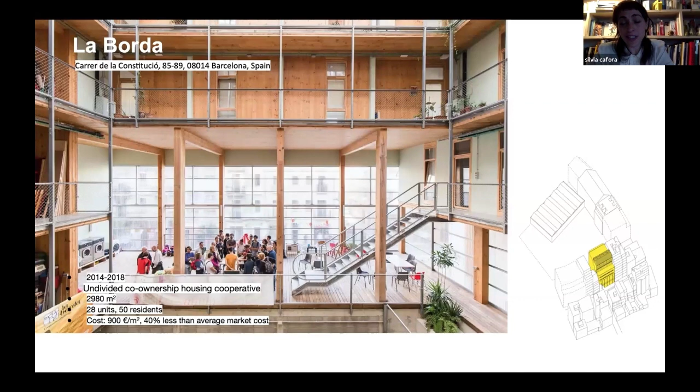So they decided to use this legal form, the undivided co-ownership housing cooperative, or right-to-use housing cooperative. It's interesting because, as you can see in the diagram, the ownership of the building is of the housing cooperative, while in this case the land is owned by the public administration.

The residents are members of the cooperative, and in order to enter and live in this building, they have to pay an entrance fee, and then a monthly fee that is below market rate. They have been able to produce an affordable pilot project, because this has been a pioneer project in Barcelona, and they created a network to do that.

Before everything, they involved the public, the municipality of Barcelona, and they created this relationship in order to have access to public land for a monthly fee.

Then they decided also to develop a network with different kinds of financing instruments, not just traditional banks, but also ethical banks, microcredits, and social bonds. And then they decided to ask actors of the social economy, the social market, to be the developers and builders of the building itself.

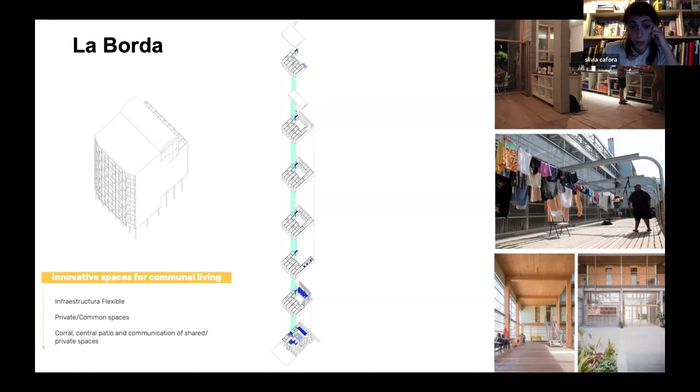Here you can see the interior of some apartments, and at the bottom left you can see this wooden frame that is one of the peculiarities of this building, because it has been the tallest wooden building in Spain for several years. This wooden frame allows flexibility among apartments, because with these portals they can easily add or remove a room from an apartment.

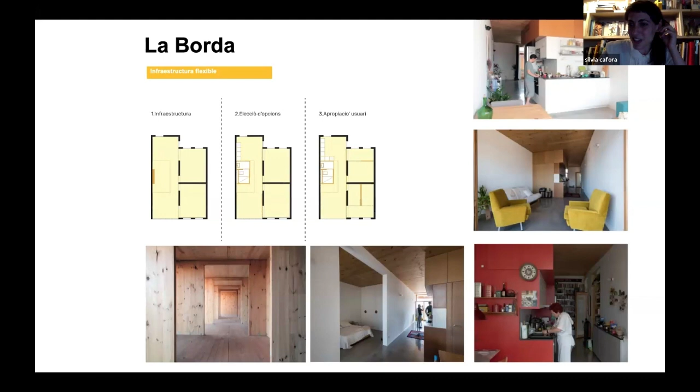That means maybe I enter La Borda, I've got 2 kids, so I need 2 rooms at least. Then my kids go to university, so I no longer need an extra room, so I give it to my neighbor who had new kids. It is an architectural device that helps the community evolve over time, and also a cultural apparatus, because can you imagine giving a room of your house to your neighbor? It's not something easy to think, but they work on this side too.

Something very important to frame here in La Borda is Barcelona itself, the municipality of Barcelona, because La Borda has been the first new cooperative in Barcelona, and after that they built 4 generations of cooperatives, and they are continuing building new right-to-use housing cooperatives. This is because the municipality of Barcelona decided to produce several tools to support this production.

First of all, they made this housing right plan, and they produced also urbanistic tools and administrative tools.

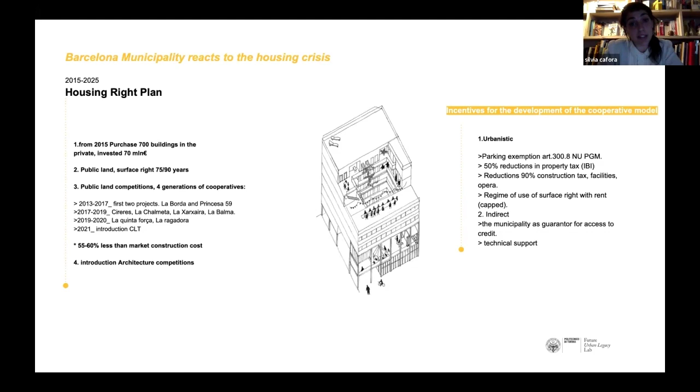Here there is La Balma, still in Barcelona. It is sister of La Borda, and it is the second right-to-use housing cooperative built in Barcelona by the same architects, La Col Cooperativa de Arquitectos de Barcelona, a group of architects that are very involved. We can say they are one of the subjects that triggered this new cooperativism in Barcelona.

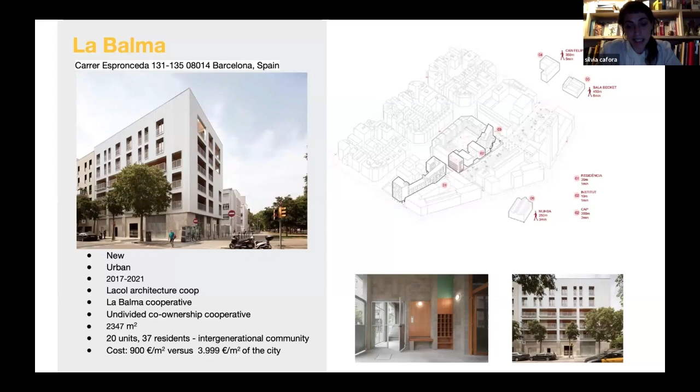As you can see here, they studied possibilities to make a flexible apartment with many public and communal spaces. Still in Barcelona, this is another cooperative.

It's interesting because it is Spain's first feminist and LGBTQ housing cooperative, started in 2018 and still in progress. It's interesting because it's not just a right-to-use housing cooperative, but they also have these peculiar members who decide to stay together.

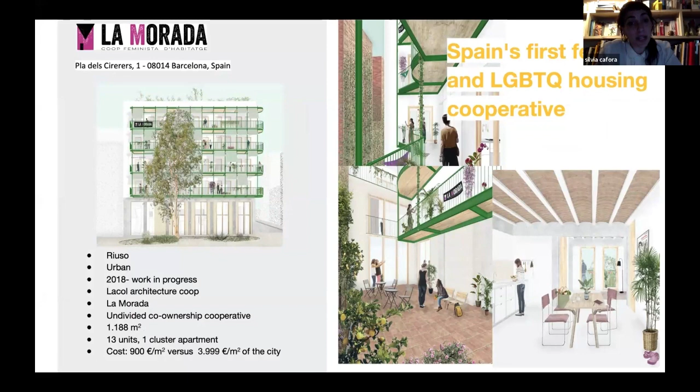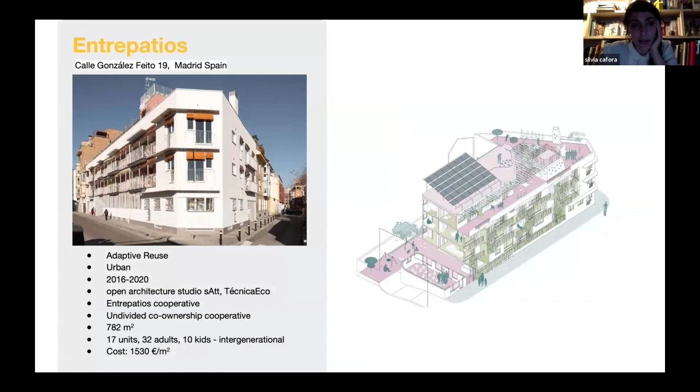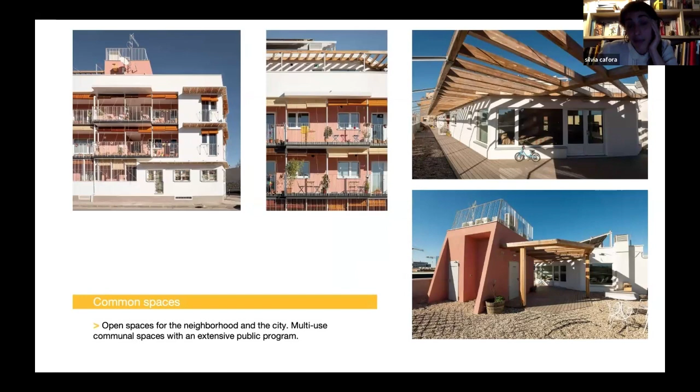Still in Spain, but we go to Madrid, because there is a spreading of all these right-to-use housing cooperatives in Spain. This one is interesting from an architectural point of view because it's not a new building like the others I've just shown you, but an adaptive reuse of a previous building that was underused or disused. They have been able to create a great space for living that is also affordable, since the base of all these projects is to make housing accessible and affordable.

So now we leave the sun in Barcelona and go to southern Germany, to Freiburg. I want to introduce a big player in Europe for housing affordability, the Mietshäuser Syndikat. Sorry for my German. The Mietshäuser Syndikat is, I would say, the inspiration—Nina, Dimitra, or Zoe, please correct me—for many community-led housing projects all over Europe.

Briefly, their story: we go back to the 90s. In Germany there was a strong financialization of housing, and a group of anarchists and squatters decided to stop squatting and create a model to access housing in a legal way, using neoliberalist tools like the LTD.

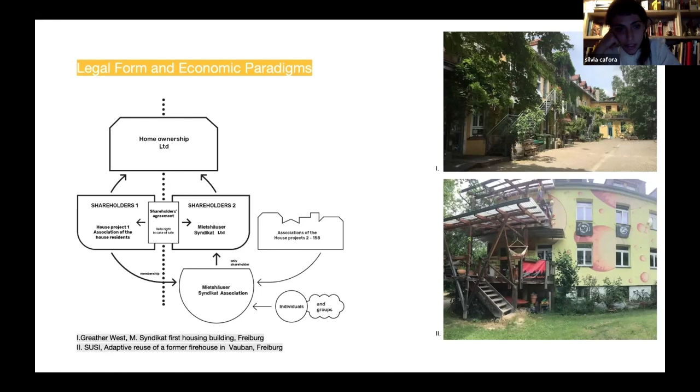Another important case I want to bring is a community land trust. We go to Liverpool in the UK, to the Granby Four Streets Community Land Trust. A community land trust is another model where the aim is always the same: to decommodify land and buildings, to make them affordable, and to keep them out of the market in the long run. The base of the community land trust is to divide the ownership: the land is owned by a trust composed of local administration, future residents, and the local community, which has veto right in case of sale, like the Mietshäuser Syndikat.

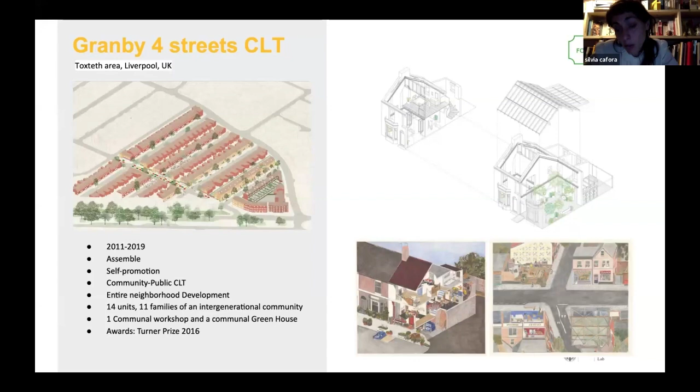It has been interesting because one of these spaces is a workshop where they produce the ceramics used to refurbish the housing. This was self-built by the residents together with Assemble. With this project, they gave work to 2 people from the neighborhood, who now work inside the Granby workshop. They also won another important prize, the Turner Prize for Contemporary Art.

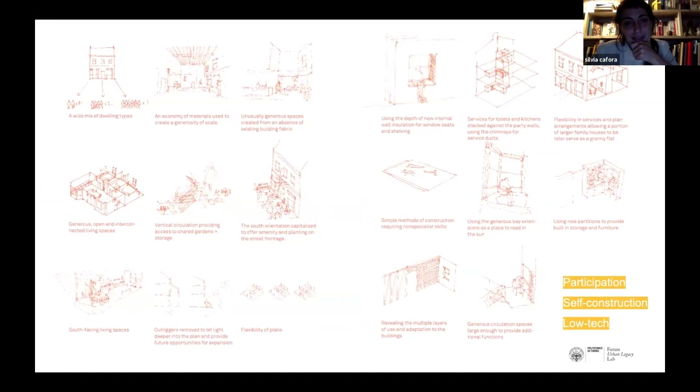They set some strategies for the architectural project and the building site that are very interesting. Community land trusts are also very spread around Europe and around the world. Even though it started in the US and arrived in Europe, in the UK and Northern Europe, it is now also spreading in Southern Europe. There are new projects in Catalonia and also in Italy, in Turin.

I'll go quickly here because I want to go straight to Italy. Time is almost gone, so I just want to point out one more thing.

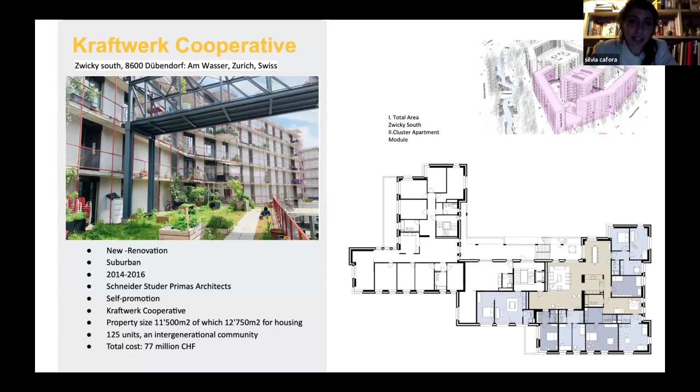A feature of a Swiss cooperative, the Kraftwerk cooperative, which also came from civic activism, from squatting activism in Zurich back in the 90s. I want to tell you how in Switzerland they've been able to innovate housing typologies, because this is an important point that can hinder the obsolescence of our building stock - they invented a new way to live together.

Many of us, while students or workers, lived in a collective house. But usually our collective houses are not properly designed. There isn't proper space for community living, and finally it becomes a disaster. After this experience, we want to buy a private home because we want our own space. This is like this in Italy for sure, but I guess it's like this in many places.

Many cooperatives, as we saw with La Borda, start to think about new housing typologies. This is interesting because it's a cluster. How does a cluster work? It is a big apartment with private spaces. The minimum space is a room with a little kitchenette and a bathroom. For a bigger family, maybe there's a room, a little living area, a little kitchen, and a little bathroom.

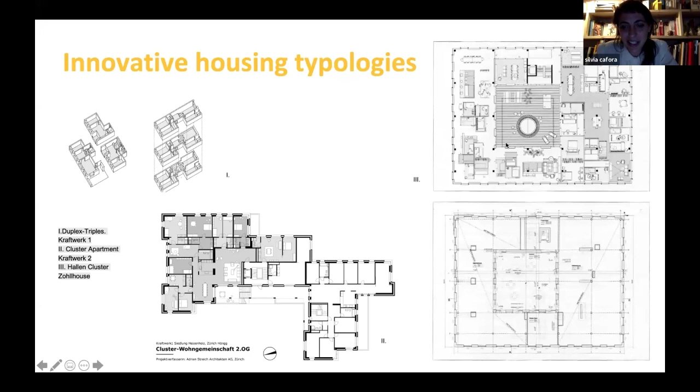But then they can access big community spaces, big communal spaces that are shared among these families. Here we can see the biggest cluster we have in Europe, which is the Hallen cluster.

This is also a way to arrive from the terrace to the lower terrace, and this is a big cluster in Geneva.

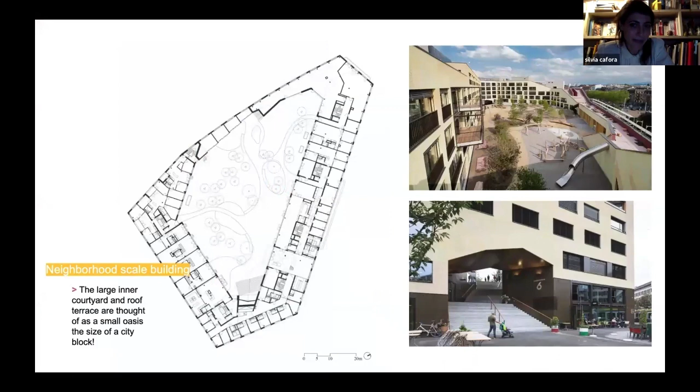Now I'll go quickly because I want to arrive in Italy, but in the meanwhile you can look at the beautiful architecture produced by cooperative housing all around. Here we are in Berlin.

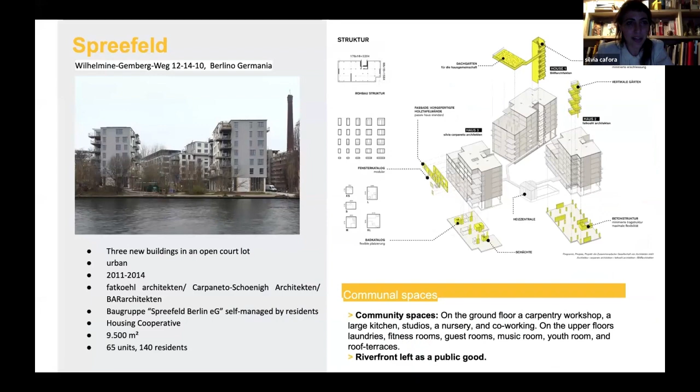And finally, in Italy we have a long and influential history of alternative housing. We now have more than 27 co-housing projects, we have eco-villages, and we have a lot of housing cooperatives, more than 8,000 buildings.

We have some national networks that don't work very well, the National Co-Housing Network and the National Eco-Villages Network. We have very traditional architecture, so we need to push a bit more in order to have a new housing typology.

Something I want to talk to you about is a very important tradition: housing cooperatives and mutualism in Italy. They represent the archetype of Italian shared living, and they were founded in the 19th century. We have more than 8,000 cooperatives and 40,000 dwellings. It's not just about housing—we have consumer, worker, social, and cultural cooperatives. Going through history, they started from worker mutual aid and went through a process of commodification.